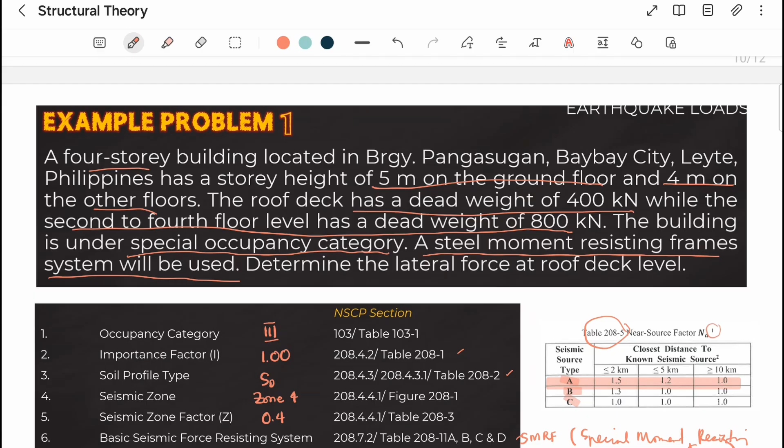Here we will get the values of R and omega O. We can find these in section 208.7.2 or table 208-11A to D. Take note that R and omega O relate to our basic seismic force resisting system used, which we said is SMRF or Special Moment Resisting Frame.

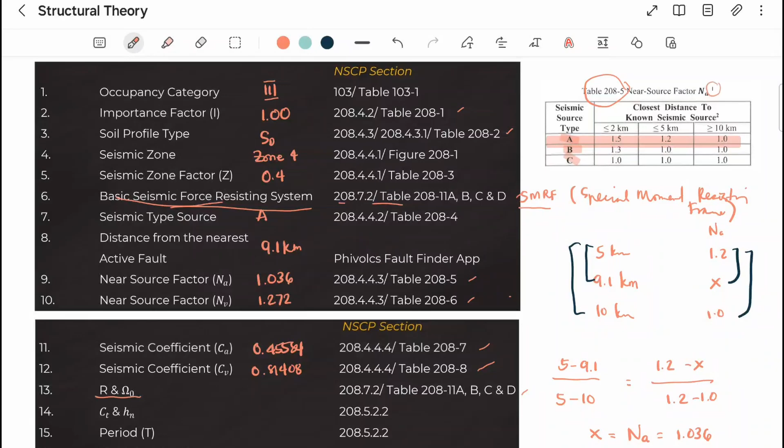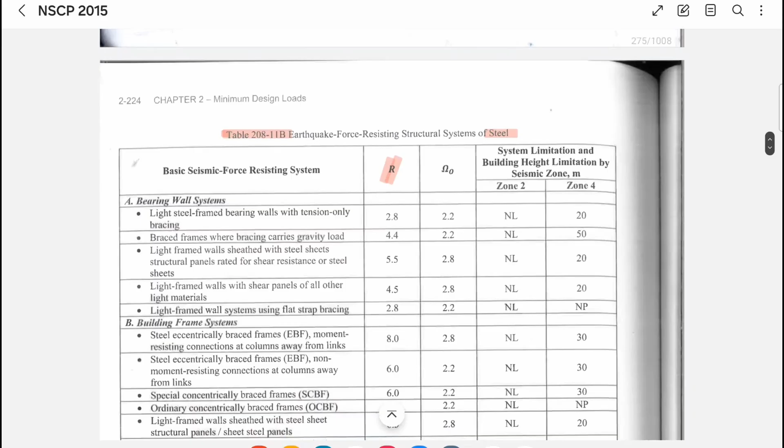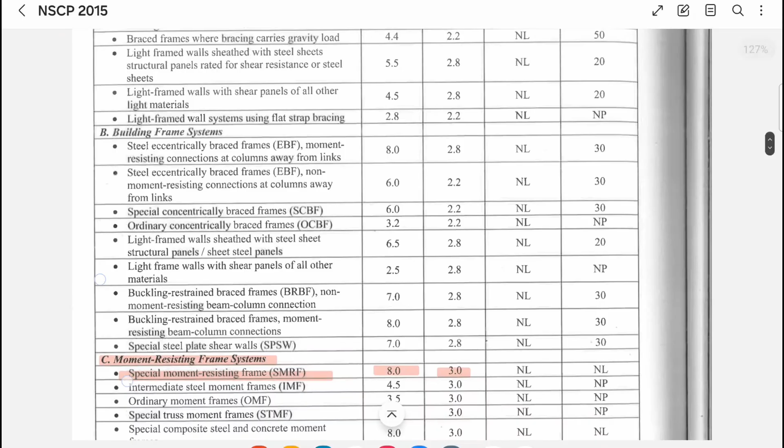Again, our chosen moment resisting frame system is special moment resisting frame system. This means our value of R is 8.0, and our omega sub O is 3.0. Let's list this in our solution: R is equal to 8.0 and omega sub O is equal to 3.0.

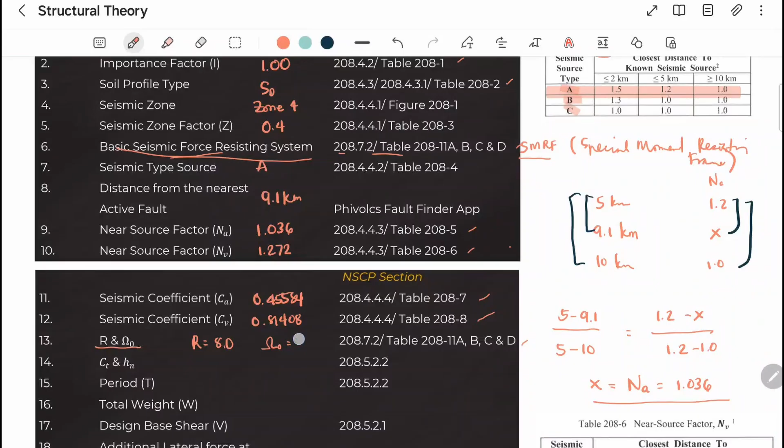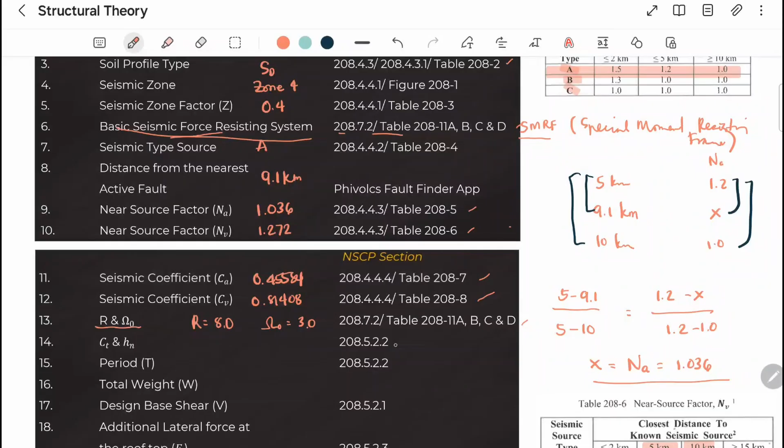Now let's move to the next step, step 14. We have to determine the value of C sub T and H sub N. We can find this in section 208.5.2.2.

We're now at 208.5.2.2, and it says: Structure period. The value of T shall be determined from one of the following methods. We can get our structure period T using method A or using method B.

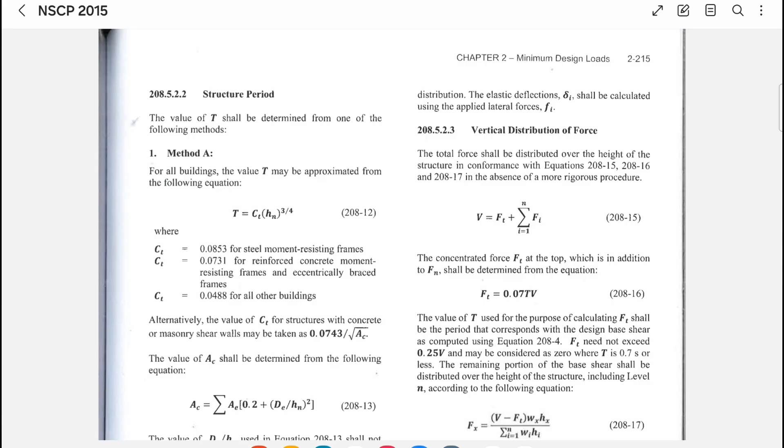Method A has the formula C sub T multiplied by H sub N raised to 3/4. So what we need to get here are the values of C sub T and H sub N. This is where we'll find the values of C sub T and H sub N.

Take note that according to the problem, our moment resisting frame is steel. It says here that C sub T is equal to 0.0853 for steel moment resisting frame, 0.0731 for reinforced concrete moment resisting frames and eccentrically braced frames, and 0.0488 for all other buildings. So what we'll use here for C sub T is 0.0853 because we have a steel moment resisting frame.

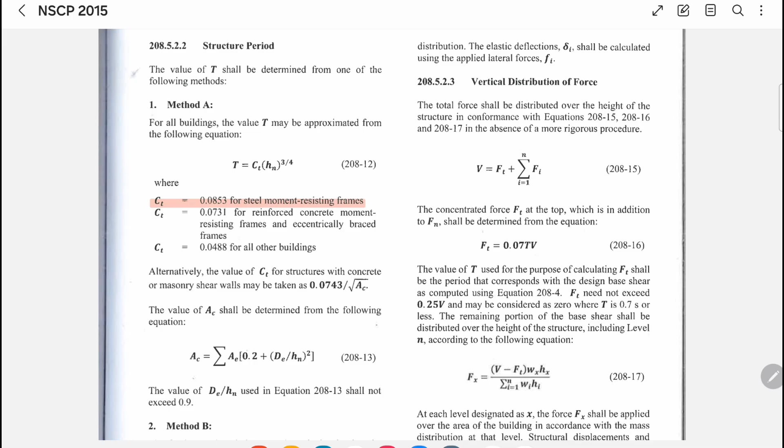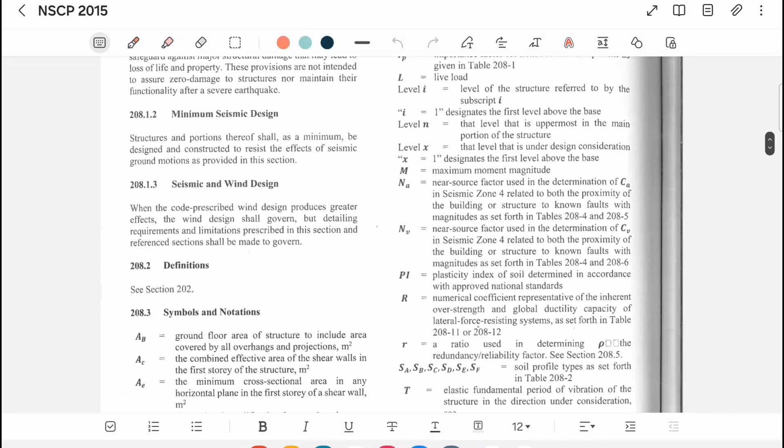Let's look for H sub N. Here it is. According to this, H sub I, H sub N, and H sub X are height above the base to level I, N, or X respectively, in meters. So it's height above the base.

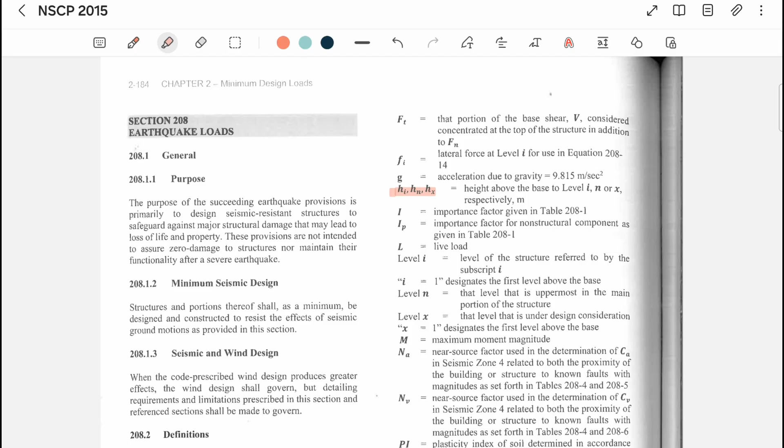So since it's height above the base, what we need for H sub N is from here going up to our top floor. So H sub N is this, and this is equal to 4 plus 4 plus 4 plus 5, which equals 17 meters. So our H sub N is the height above the base to level N, which is 17.0 meters. Now we've solved our H sub N.

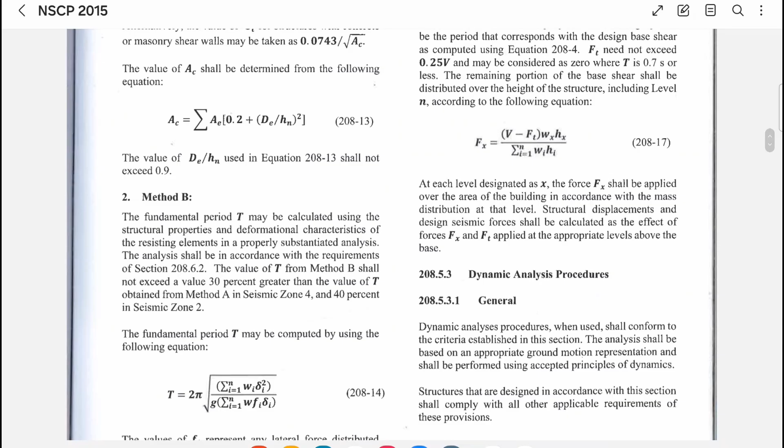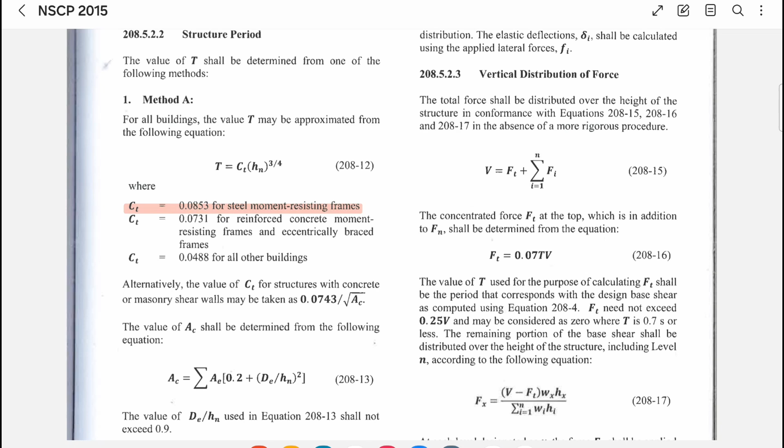For method A, the formula for period T is equal to C sub T times H sub N raised to 3/4. Take note that T here is in seconds, so this is a time. I've written the formula for period, and that is C sub T times H sub N raised to 3/4.

Let's compute this first, then we'll explain what period means. So C sub T is 0.0853, H sub N is 17.0 raised to 3/4. So our T here is equal to 0.7141, and this is in seconds. Now, what does period mean?

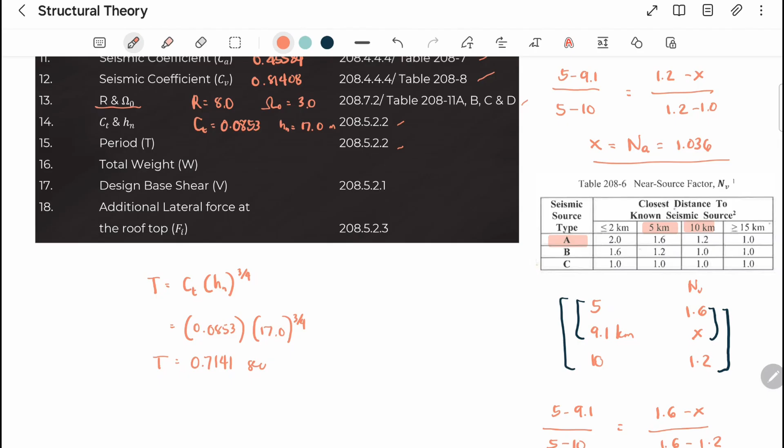Okay, so ang nangyayari dito guys, kapag gumalaw yung ating ground, yung tendency sa structure is that gagalaw din siya, depende sa flexibility ng ating structure. So for example, ito yung ating building, itong orange na ito, at itong black naman ay yung ating ground. Initially, nandito yung top point ng ating building, pero pag gumalaw na siya, magsa-start na siyang pumunta sa right, tapos sa left, tapos right ulit, and then left, and then right - pabalik-balik hanggang sa mag-stop yung kanyang pag-move, kapag nag-stop na rin ang movement ng ground.

Okay, so ngayon, ano ba yung ibig sabihin ng period? So yung period ay yung time na ginugol ng structure para makabalik siya sa dating position. For example, dito yung initial point ng ating structure, tapos napunta siya dito. Dito tayo magsa-start ng count ng time, tapos papunta siya dito ulit, tapos pagbalik niya dito - ayun, ilan yung time na ginugol niya para makabalik siya sa position na ito.

So again, yung period ay yung time para makabalik yung ating structure sa kanyang same na position. Hindi yung gitna yung ating measure, no? Kasi kung gitna, magiging kalahati lang yung ating measure nun, kasi babalik agad siya kahit nasa gitna man yung point na yun. So yung gilid yung ating basis - yung gilid is yung base point.

Okay, so ayun na nga guys, no? Take note lamang na kapag ka-rigid yung ating structure, yung time period ay maliit, pero kapag ka-flexible yung ating structure, yung ating time period ay malaki. So ano ba yung maganda - maganda ba na rigid yung ating structure or maganda ba na flexible? Take note guys: kapag malaki yung time period, ibig sabihin matagal bago makabalik sa dating position yung ating structure, ibig sabihin hindi masyadong ma-vibrate yung ating structure kapag ka-flexible siya. Pag rigid naman, kapag maliit yung ating time period, masyado siyang ma-vibrate. So ganun yung ibig sabihin.

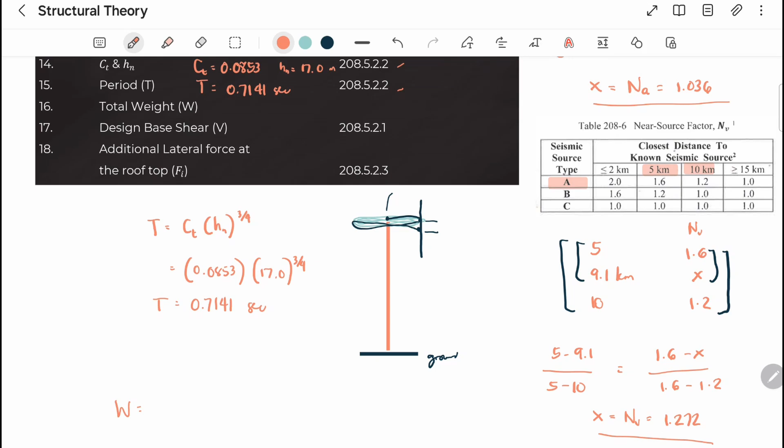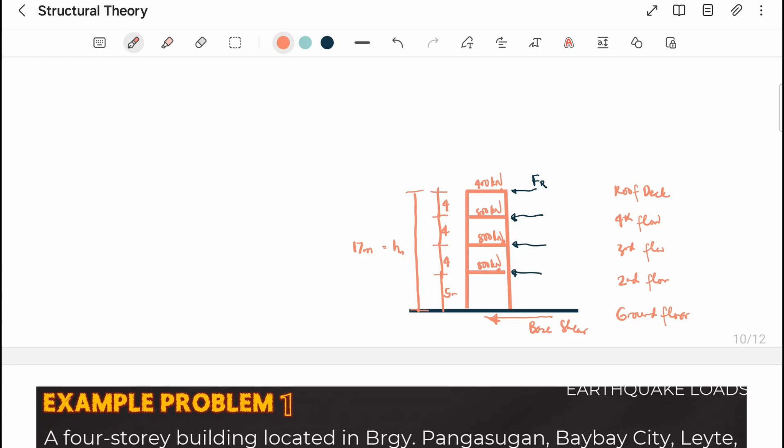So para sa ating total weight, all we need to do is i-total natin yung ating mga weight ng ating mga slabs. Sabi natin kanina sa ating problem, yung ating second floor ay merong 800 kilonewtons na weight. Third floor is 800 kilonewtons, fourth floor is also 800 kilonewtons, and the roof deck is 400 kilonewtons. So ito total lamang natin to guys - hindi kasama si ground floor dito - para makuha natin yung ating total weight ng structure.

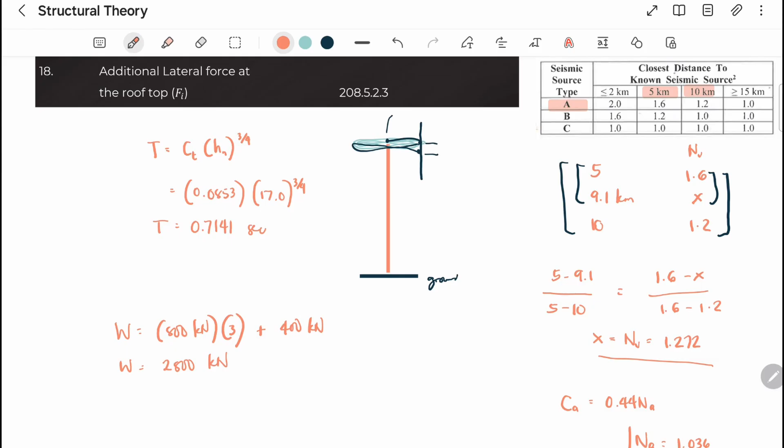So the total weight is equal to 800 kilonewtons times 3, tatlo kasi yun, plus isang 400 kilonewtons. So the total weight is equal to 2,800 kilonewtons. Ayun, so nakuha na natin guys yung ating total weight, again, and it is equal to 2,800 kilonewtons.

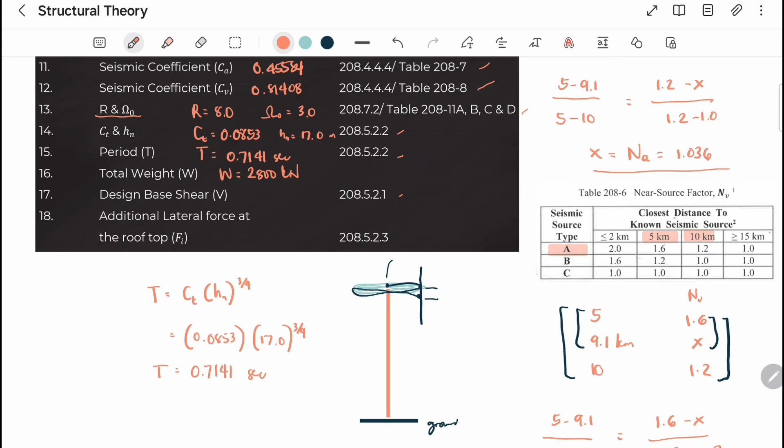Ayun, so ngayon na nakuha na natin guys yung ating total weight, then we can now compute for the design base shear. At doon natin yun matatagpuan sa NSCP section 208.5.2.1. So dito tayo guys sa section 208.5.2.1, nandito yung ating design base shear. Ang sabi dito, the total design base shear in a given direction shall be determined from the following equation.

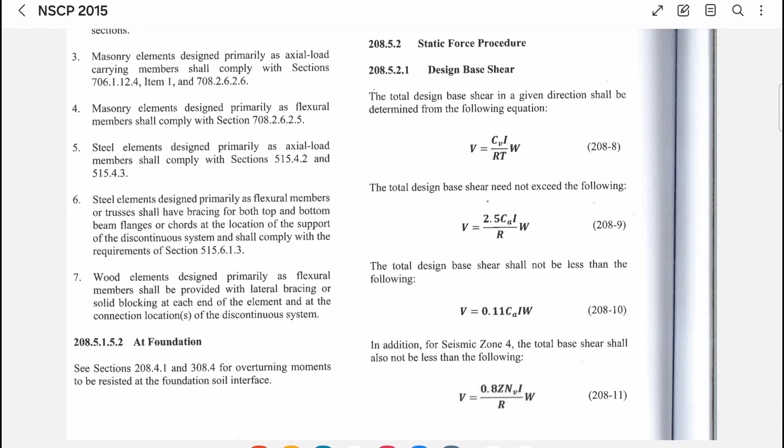So yung ating formula para sa design base shear is equal to C sub V times I divided by R, multiplied by T, multiplied by the total weight W. Then the total design base shear shall not exceed the following - hindi daw dapat siya lumampas dito sa formula na to sa 208-9. And the total design base shear shall not be less than the following - hindi dapat siya mas bababa sa formula natin sa 208-10. In addition, for seismic zone 4, the total base shear shall also not be less than the following - hindi rin dapat siya mas bababa sa itong formula na to.

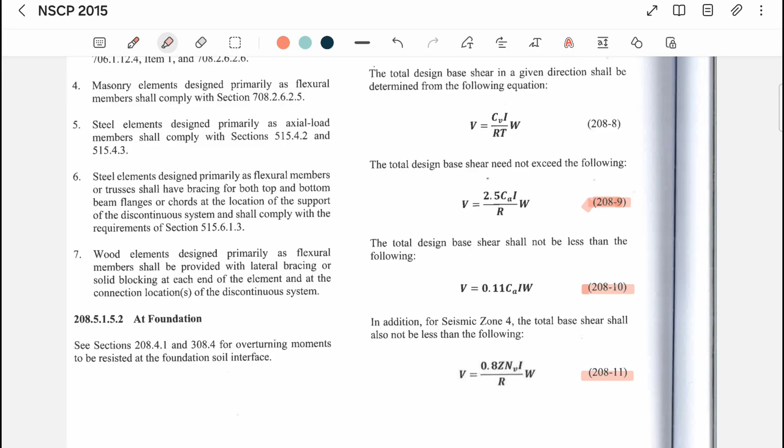Okay, so ayun, so compute natin dito guys yung ating design base shear. Kopyahin natin to. Okay so again guys, i-summarize lamang natin itong nandito sa code - yung ating formula para sa design base shear is C sub V multiplied by I divided by R times T times W.

Okay, take note guys na dapat hindi siya mag-e-exceed sa nasa 208-9. So ibig sabihin, yung ating formula para sa maximum design base shear ay 2.5 times C sub A times I divided by R times W.

Then we also have, ang sabi dito sa 208-10, the total design base shear shall not be less than the following. So yung ating minimum is 0.11 C sub A I times W.

Then in addition, for seismic zone 4 - di ba nasa seismic zone 4 man tayo - the total base shear shall also not be less than the following. So minimum din natin ito guys: this is equal to 0.8 times Z times N sub V times I divided by R times W.

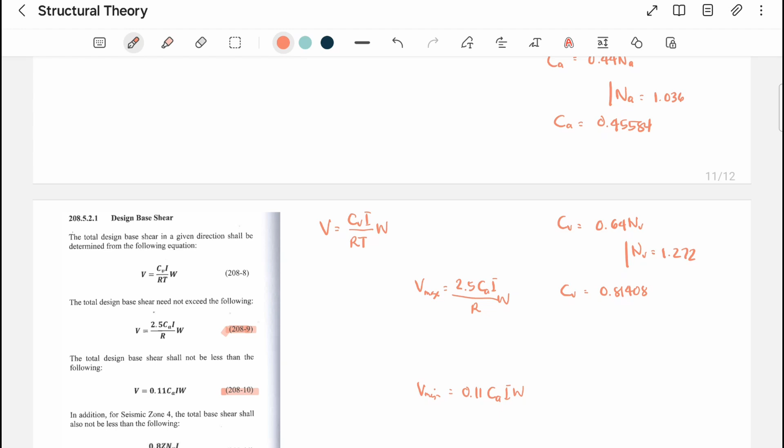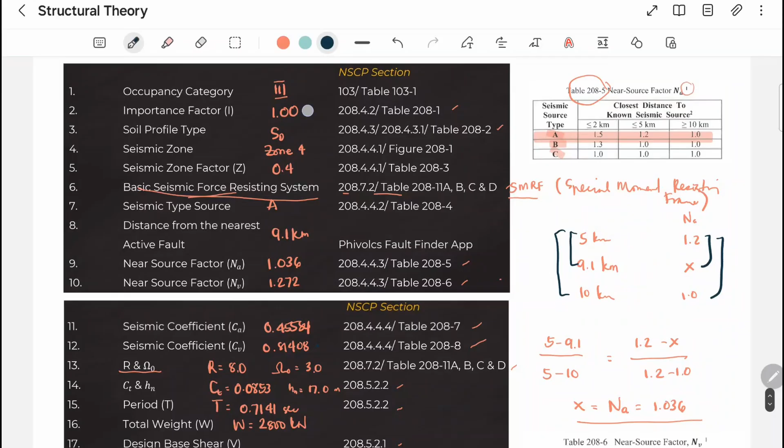Okay, i-substitute natin. Kunin muna natin yung ating design base shear. So, C sub V natin is equal to 0.81408. I natin dito is the importance factor, that is 1.0. Divided by R, which is 8.0. Yung ating period na nakompute pa lang natin is 0.7141 seconds. Yung ating total weight is equal to 2,800 kilonewton, naka-kilonewtons yung unit. So yung ating total design base shear is equal to 399.00 kilonewtons. Yan yung ating computed na total design base shear.

Ngayon i-compute naman natin yung ating maximum kasi dapat hindi siya lalampas dito. Ito ay 2.5 times C sub A. C sub A natin dito is 0.45584, I natin is importance factor 1.00, R natin ulit is 8.0, and W is equal to 2,800 kilonewton. So ang Vmax is equal to 398.86 kilonewtons.

So i-compute natin yung ating minimum. Mamaya na natin i-evaluate. Yung ating V minimum is 0.11 times C sub A, na 0.45584, multiplied by 1.00 na importance factor, then 2,800 kilonewtons yung total weight. Yung ating V minimum ay 140.399 kilonewtons, o 140.40 kilonewtons. Next, i-compute natin yung ating V minimum dito sa isa pang formula.

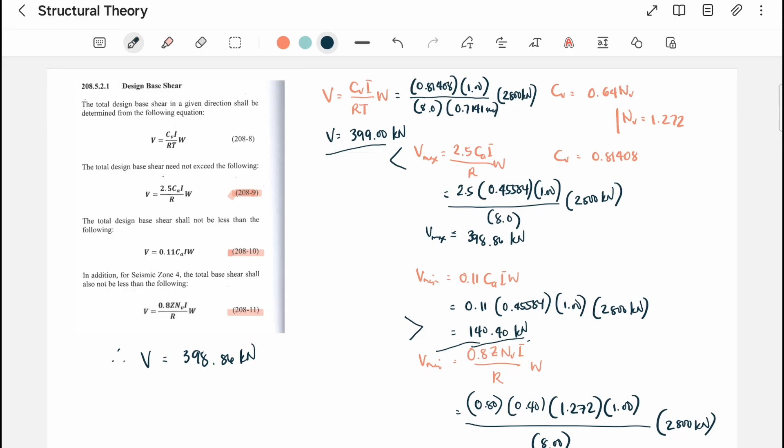Dito tayo sa maximum. Ang sabi dito, yung ating maximum is 398.86. Dapat yung ating design base shear ay mas maliit sa maximum. Tama ba? Ang nangyari, naging mas malaki si 399 compared kay 398.86. So yung ating gagamitin na design base shear is equal to 398.86 kilonewtons. Ito yung ating gagamitin na design base shear, kasi lumampas tayo sa maximum noong kinompute natin, which is hindi pwede. So yung ating governing ay 398.86 kilonewtons.

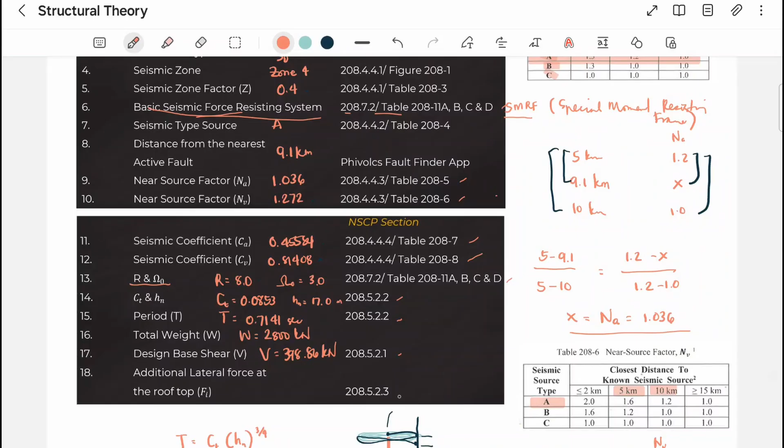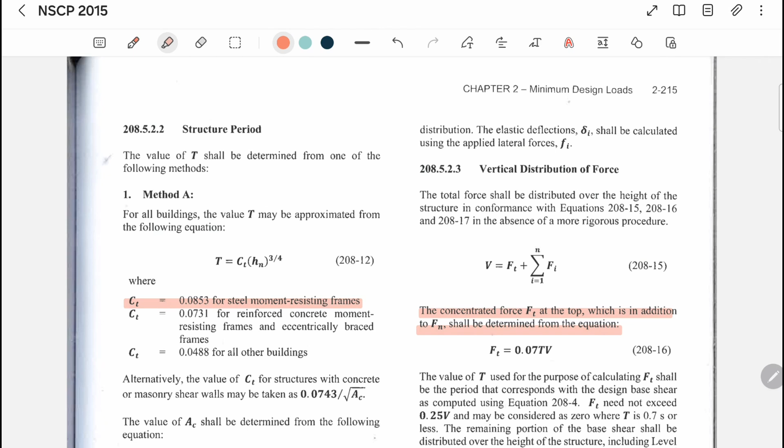Next is the additional lateral force at the rooftop. Ngayon gusto nating i-compute yung additional lateral force at the rooftop. Makikita natin siya sa section 208.5.2.3. Ang sabi dito, the concentrated force at the top, which is in addition to F sub n, shall be determined from the equation. Ito yung equation na gagamitin para makuha natin yung additional na concentrated force at the top, which is 0.07 T times V. Para sa ating F sub T, ito ay 0.07 T times V.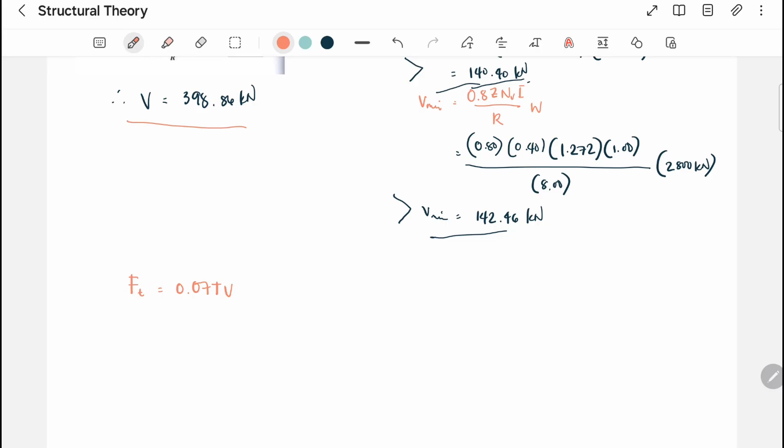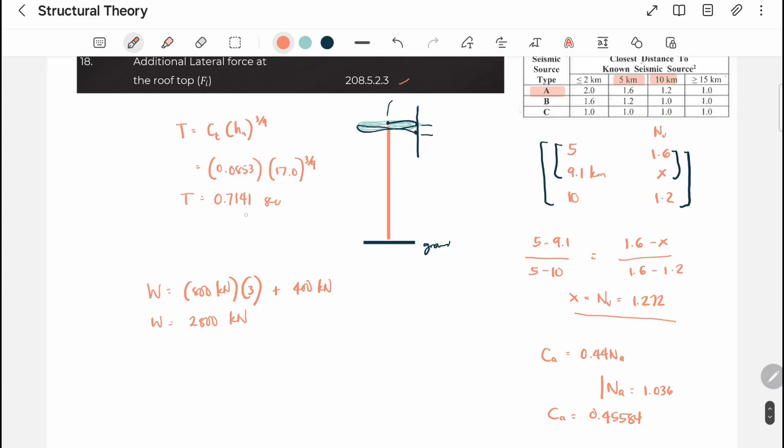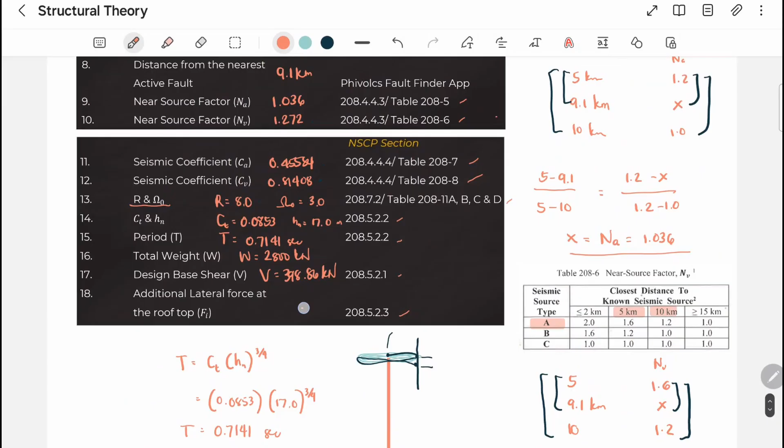Ang gawin natin ay i-compute natin ito. Na-compute natin kanina yung ating period at saka yung design base shear, kaya makokompute din natin to. 0.07 times the period, which is 0.7141 seconds, times the design base shear, which is 398.86 kilonewtons. Bale makukuha natin itong F sub T, ito yung ating additional na lateral load at the top. Yung nakuhang F sub T ay equal to 19.94 kilonewtons. Nakuha na natin yung additional lateral force at the rooftop, na 19.94 kilonewtons.

I-analyze muna natin yung nangyayari. Ang ginawa natin kanina ay nakuha natin yung design base shear, na nasa baba, V natin is equal to 398.86 kilonewtons. Ito yung design base shear na ito yung equivalent na force kapag gumalaw na nga yung ating structure. Ito ang magiging equivalent na force kapag gumalaw na nga yung structure, at ina-apply natin ito diyan sa may base, kaya nga siya tinawag na design base shear. Ngayon, take note na yung design base shear na ito ay i-resist ng mga floor slab natin sa every floor. Ibig sabihin, kailangan natin itong i-distribute to the concentrated force at the second floor, third floor, fourth floor, at saka sa may roof deck.

Okay, so yung na-compute natin na F sub T, 19.94, is an additional na force na ilalagay natin sa may roof deck. Yung F sub T na yan, i-add natin siya sa may roof deck. Okay, so ngayon, paano natin ma-distribute yung 398.86 sa mga lateral concentrated forces na ito?

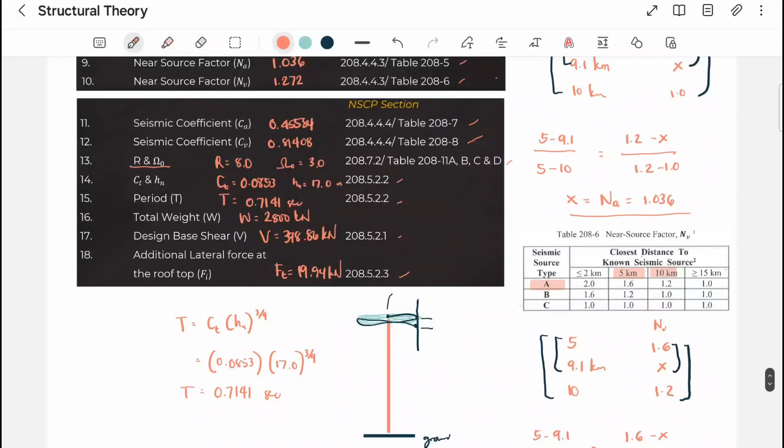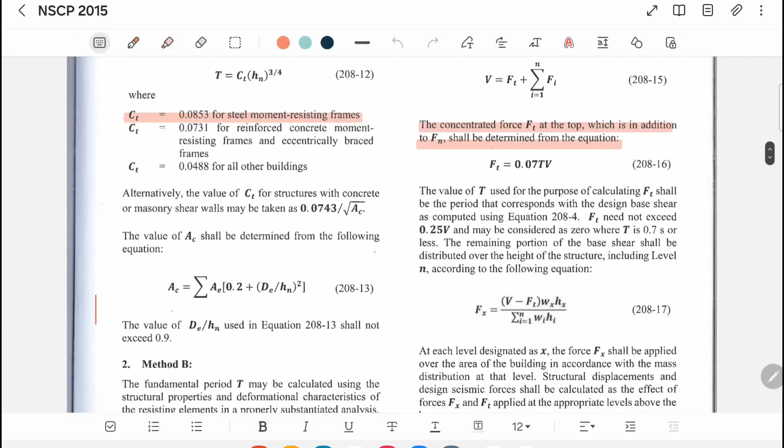Okay, so again guys, pumunta ulit tayo sa NSCP para makuha natin yung ating distribution. Ano ba yung ating formula na gagamitin? Dito tayo sa section na to kung saan natin nakuha yung ating formula para sa concentrated force at the top, which is in addition to F sub n. Ang sabi dito, the remaining portion of the base shear shall be distributed over the height of the structure, including level n, according to the following equation.

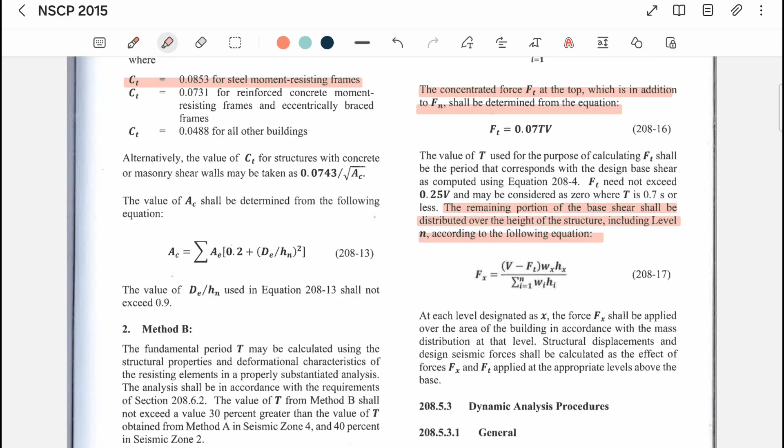So, ito yung ating kukunin na equation. That is V minus F sub T multiplied by W sub X, H sub X, divided by summation of W sub I times H sub I. Okay, so nilagay ko lang dyan yung ating formula.

Okay, so ang gawin muna natin guys ay i-fill out natin itong table na to, para mas madali yung ating magiging computation. Naglagay ako dito ng level, yung weight, yung H, W times H, at saka F sub X. Yung F sub X, ito na yung ating i-compute na distributed na force.

Okay, so W natin dito sa roof, guys, is 400. Fourth floor ay 800. Third floor is also 800. And second floor is also 800 kilonewtons. Okay, next is the height, H.

Yung height natin, guys, sa may roof is 17 meters. Next is the fourth floor, that is 5 plus 4 plus 4, that is 13. Next is 5 plus 4, that is 9. Next is 5.

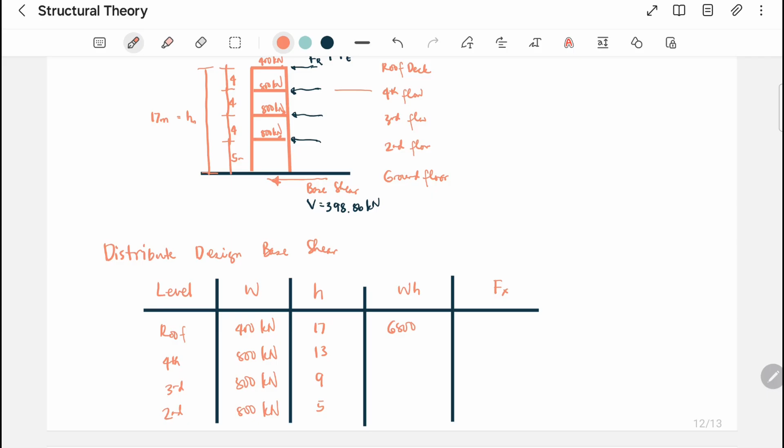Next, W times H. Kailangan natin i-multiply yung W times H. So, ito ay 6,800, 10,400, 7,200, 4,000. Okay, so ngayon, i-compute natin guys yung ating F sub X.

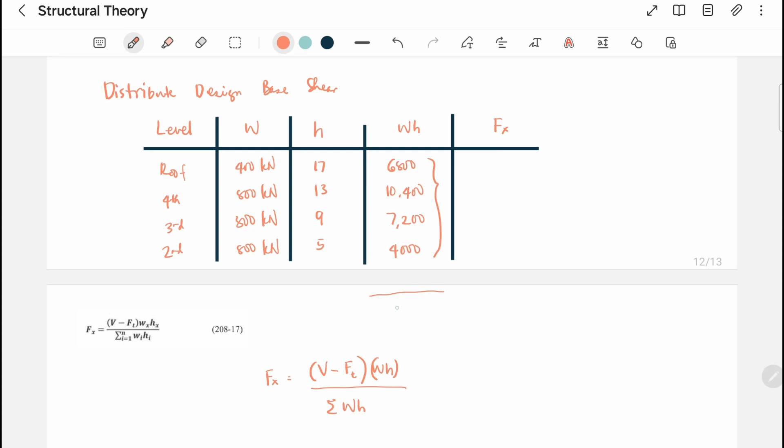Yung ating formula para sa F sub X ay equals to the design base shear minus F sub T, multiplied by WH, then divided by summation of WH. So, summation muna natin lahat ng WH: 6,800 plus 10,400 plus 7,200 plus 4,000 is equal to 28,400. Ito yung ating summation of WH.

Yung ating magiging formula, kung sasubstitute natin, yung ating F sub X dito will be equal to the design base shear, 398.86, then ima-minus natin yung F sub T, which is 19.94, then divided by summation of WH, which is 28,400.

Okay, so dito sa portion na to, dito natin ilalagay yung ating mga WH. For example, kung magkukompute tayo ng sa roof, kailangan natin ilagay dito si 6,800. So, what will be our F sub X kung 6,800 yung ating WH? This is equal to 90.73.

Next, kung sa 4th floor tayo mag-compute, ipapalitan natin ng 10,400, ito is 138.76 kilonewtons. Next, sa may 3rd floor naman tayo, palitan natin ito ng 7,200, and that is 96.06 kilonewtons. Next, sa may 2nd floor tayo, palitan natin ito ng 4,000, and this is 53.37 kilonewtons.

Okay, i-total muna natin guys. Dapat ang total nito ay yung 398 minus 19.94. Ilan yung 398.86 minus 19.94? So, ito is 378.92. Ito dapat yung total dito, 378.92. I-add natin 90.73 plus 138.76 plus 96.06 plus 53.37. This is 378.92.

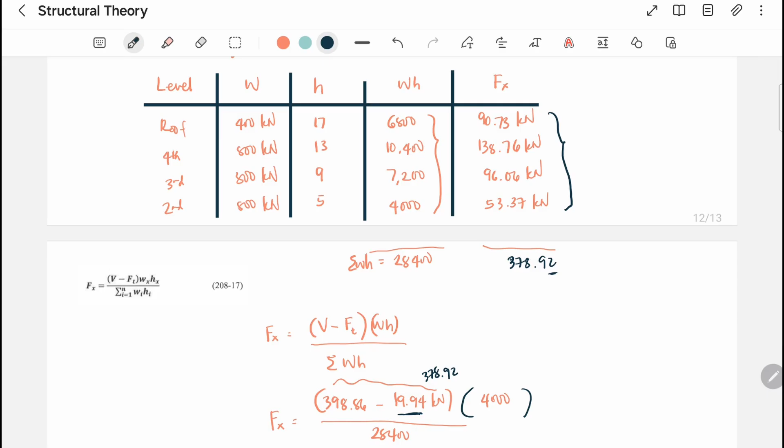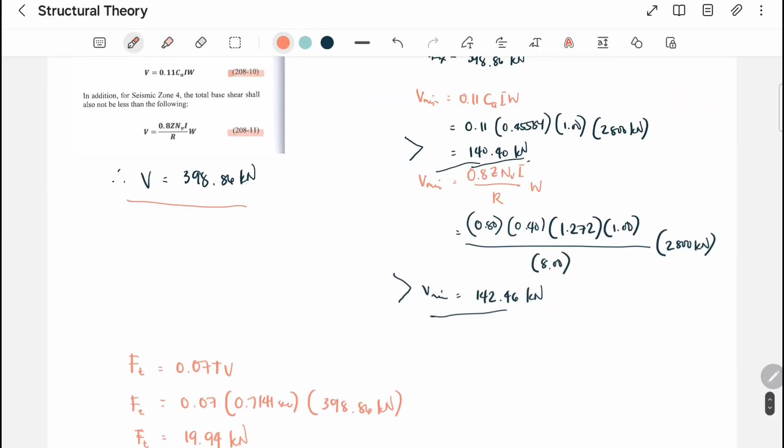In other words, ang tanong kasi dito sa problem is determine the lateral force at the roof deck level. Yung ating lateral force sa may roof deck level is yung F sub R, yung mapupunta na force sa may roof deck, plus yung F sub T.

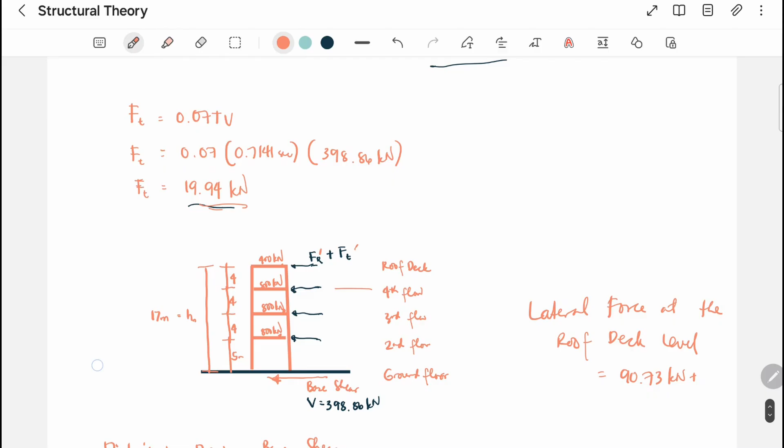Bale, yung ating lateral force at the roof deck level is equal to 90.73 kilonewtons plus yung ating na-compute na F sub T. Take note, ito ay ilalagay sa top, that is 19.94. So, this is equal to 110.67 kilonewtons. Ayun, so yung sagot natin ay 110.67 kilonewtons.

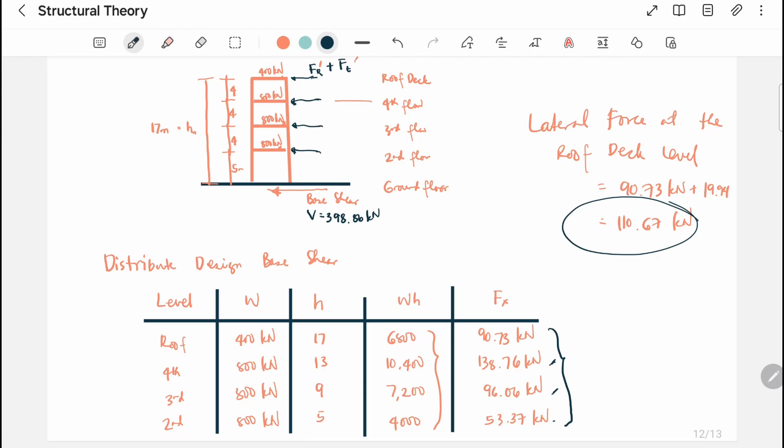Another question. What will be the lateral force at the 4th floor? 138.76. What will be the lateral force at the 3rd floor? 96.06. What will be the lateral force sa 2nd floor? 53.37. So, ayun, na-distribute natin, guys, yung ating base shear at every floor level. So, ganun lang, guys, yung ating pag-compute ng earthquake load.